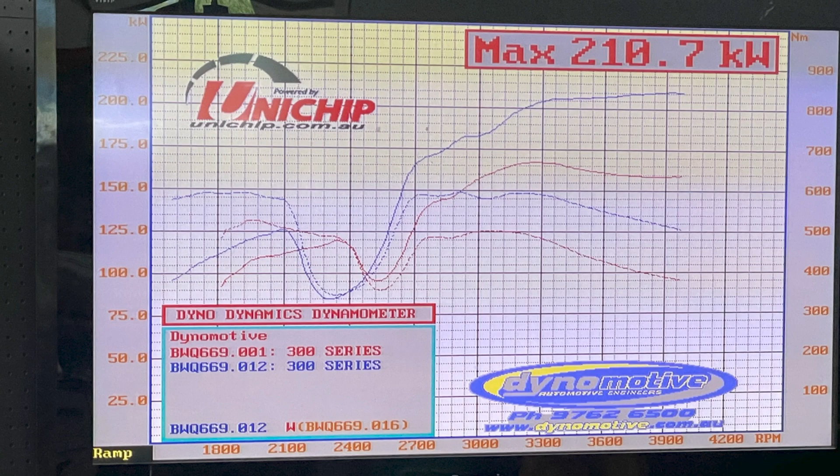Okay, so Unichip is an additional supplementary computer. It allows us to tune any fuel injected vehicle, whether it be petrol, diesel, LPG, whatever. It's been around since the 90s. I've been involved with it since then. It basically is an add-on module. You can do 5 different tunes.

So you're not locked into a tow tune or a safe tune or a power tune, where at the flick of a switch while you're driving, you can switch between 5 different tunes, whether it be power, towing, economy, bit of 4x4, which have all got different strategies built in, and you can change that on the fly. So that makes it really universal. You can't achieve that many other ways.

So that basically allows you to cater for all conditions that you might encounter while you're driving, whether you just want to have a bit of a go from the lights, or you're towing a van on the weekends. You can have a tune to suit every occasion.

The new thing about the 300 series is the turbo arrangement, being a twin turbo vehicle, and it's what you call a sequential turbo, so both turbos don't work at once. They basically run a little turbo below about 2,500 RPM, and then it switches over to a bigger turbo at the higher RPM. Hence why you can see the dip in those graphs, and that's basically where it changes over.

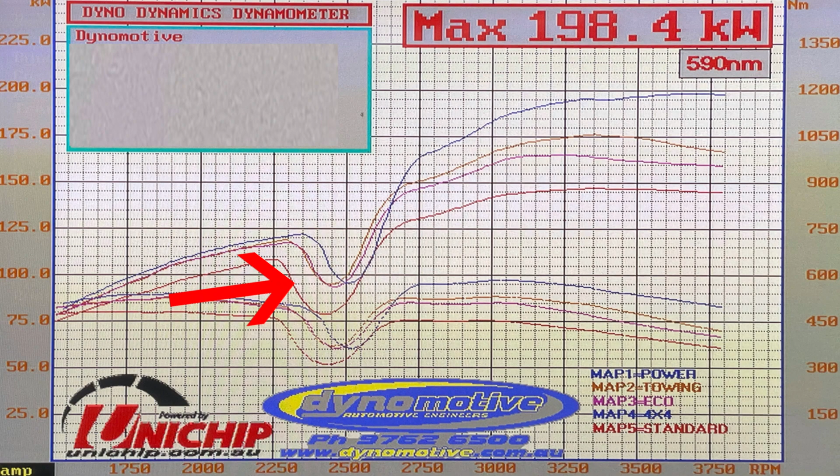So there's lots of flaps and controls. Basically there's a flap closing off the exhaust gas to the bigger turbo, and everything takes time for it to open and for that second turbo to start spinning and build some boost up, and that's why you see that dip in the graph.

It did offer a bit of a challenge tuning wise, just getting our head around it, what it liked, what it didn't like, how we can affect that dip in the graph between the changeover between the smaller and larger turbo. So that's been quite challenging, getting a good idea on how Toyota make these things work.

I just wanted to say thanks for giving me 5 minutes of your time so we can go on this drive. Well, I get out of it in 5 minutes, do I?

Well, what I'm trying to do here is not point out an obvious flaw with a car, just pointing out a way of detecting it so people can understand what we're talking about when we say the crossover point between the primary and the secondary turbo. A few manufacturers have had a go at the sequential turbo thing over the years, and they could never transition properly from primary to secondary. It's diaphragm controlled, so there's this massive void from one bleeding off to the next one coming on.

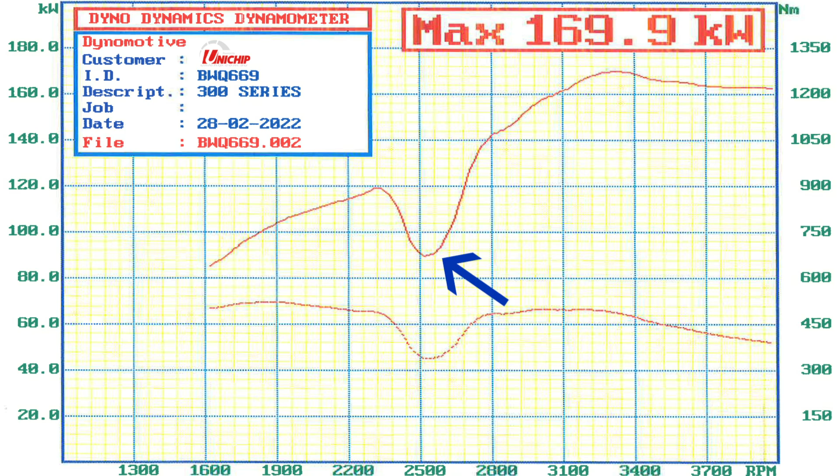The standard dip is 37, 38, 39 kilowatts of fall. So it falls 37, 38, 39 kilowatts and then climbs back out of it. And that's a fair old trough. That's a big drop in power and torque at that point. So to try and blend that out and tune that out so that we've got a 20 kilowatt dip. So it's still a dip, it's always going to be a dip. But we're trying to minimise that dip.

Yeah, look, most of the time you're probably driving through that point. And the 10-speed transmission is going to hide a lot of that dip, if you like. Transitions from the small turbo to the big turbo. But certainly on the dyno, it shows up quite obviously. Driving it, as you said, you don't notice it very much unless you're really looking out for it and you hold it right at that changeover point. Most people wouldn't even realise it's happening.

Rob gave a really nice explanation of the primary, secondary turbo and how it works, and there's a flap arrangement, a diaphragm control, and we're fighting with a mechanical setup, so the size of that diaphragm and how quick it responds and all those sort of things. We've got control of all that stuff, but there's a fair bit of mechanical stuff happening there that does take time. Rob thought that you could hardly feel it on the road, and depending on how you drive it, you can hardly feel it.

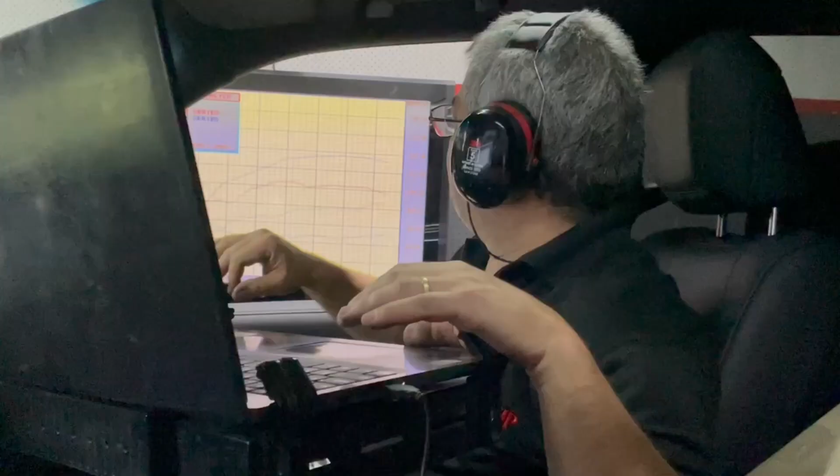Trying to get rid of the dips. Sorry? Trying to play around with the dips in it. Is it working? Yeah. It looks better. Yeah, better than the first one.

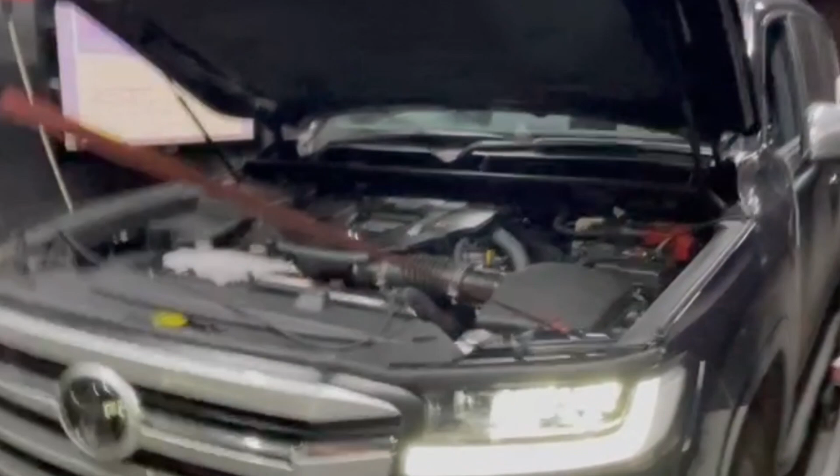It's not just stock LC300s that we see. In fact, I doubt very many of them that come through the shop are going to have factory airbox and factory snorkels and things like that. The majority of them are going to be modified. If you judge the 200 series or even the Y62 Nissan Patrol, people are going to use these for four-wheel driving. They're going to bolt everything to it.

So I wanted to touch base on the differences between a factory one and the setup that we've developed for it versus one that does have a snorkel and an airbox. So I grabbed the details off this customer's one that we were in the middle of doing as well. I just thought I'd throw some information because surely people are going to ask these questions.

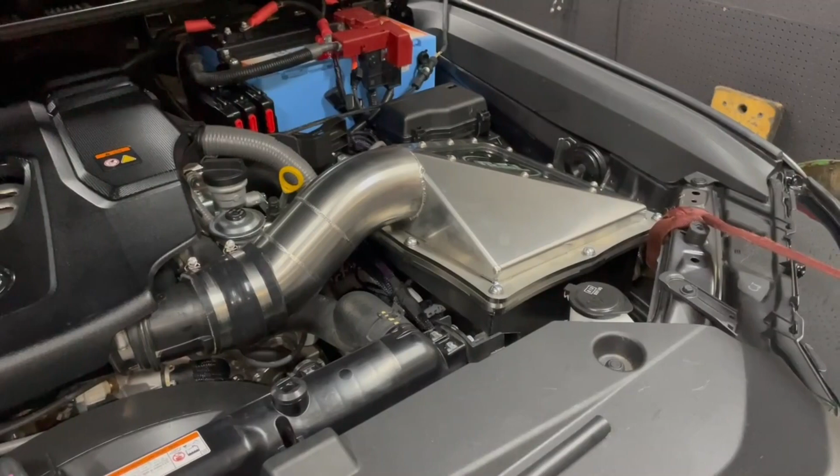Yeah, look, I mean, it is a little bit more difficult. It took a little bit more time to just get our tuning strategy around this twin turbo setup, especially with airflow characteristics and limits, if you like. I mean, obviously with this car, we'd never done one before. We've done all our development on a dead stock car, as we always like to do.

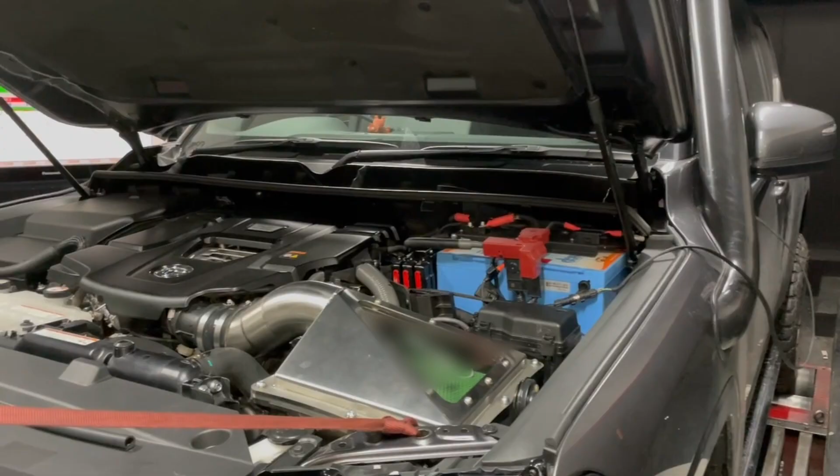Whereas this thing's got an aftermarket airbox and a rear-facing snorkel. It just brought a whole new level of problems. It was quite amazing. The dips just kept coming and coming and coming, and they wouldn't go away. So I've just spent the whole morning doing a tuning strategy for this particular vehicle, and I guess that's the whole idea of the Unichip.

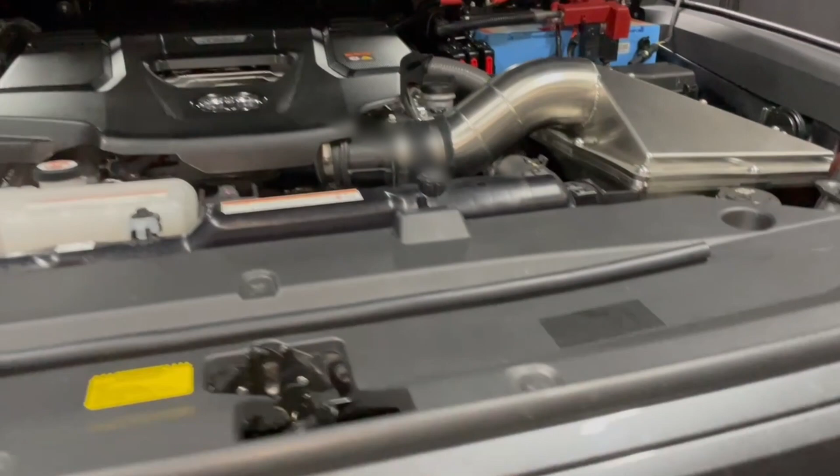We can custom tune to suit your mods, and I think what the 300 has shown is these mods, which are quite common mods, are really going to have an effect on your overall power and your overall drivability. Like I said, it's required a totally different tuning strategy than it did with the standard airbox.

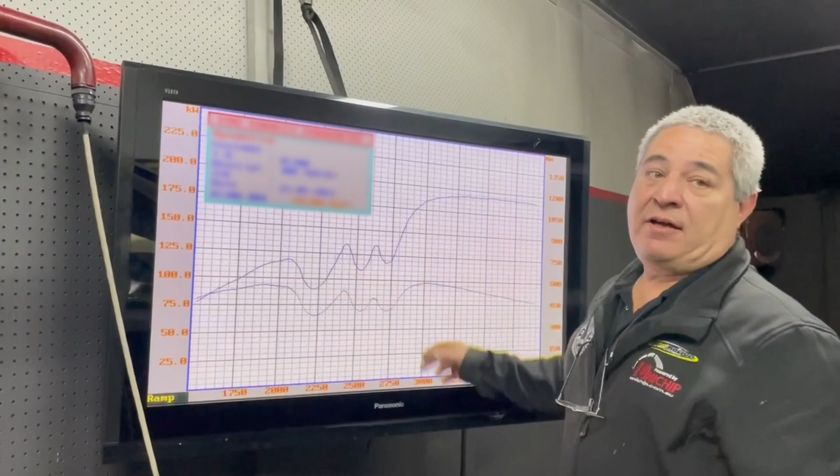See here, this is just a graph of what I was explaining earlier about the airflow through the airflow meter not being happy. This is what happened when we just fitted the tune basically out of our own vehicle into this one, which has a modified airbox and snorkel. And you can see we've got the dip that happens as it changes over to the bigger turbo, and then it just got all these other big dips where it was obviously not happy with the amount of airflow through the airflow meter, and it was doing some crazy things with boost.

So obviously that's what we have to spend some time on to get around that and tune this vehicle to suit the airflow demands with this air cleaner and snorkel package. And that's the thing, there'll be different brands of airboxes and different brands of snorkels. Everyone's got their own idea on what works and what doesn't. So these are going to need a bit of fine tuning at the end when you're getting this fitted up.

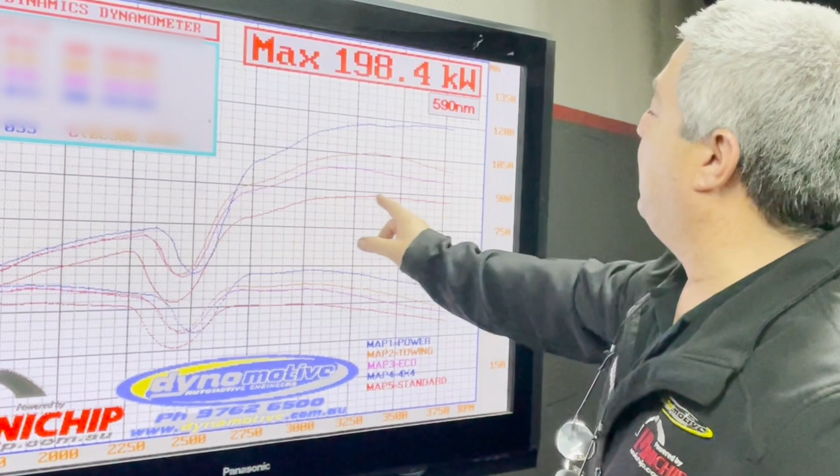Okay, so as we can see here, our red line is our standard power, or our before power, which on this vehicle was just below 150 kilowatts. Ours made 165, so it is a little bit lower, isn't it? Yeah, and that's why we tune every vehicle live on the dyno, and it's just not one size fits all. That's why we custom tune to suit every vehicle.

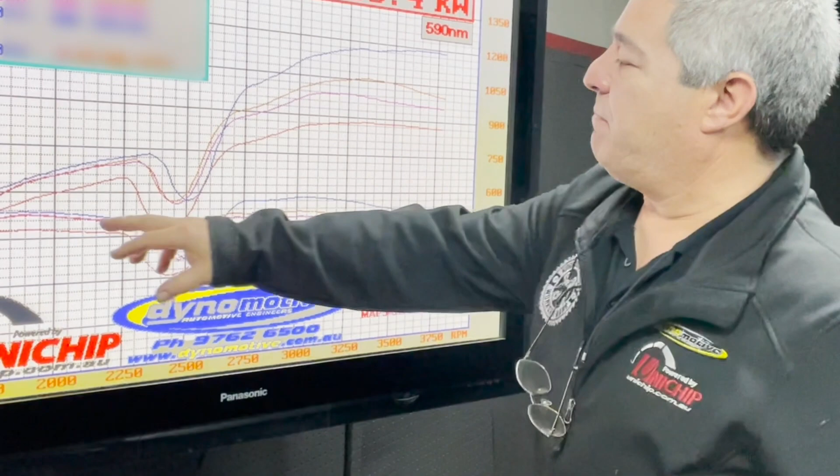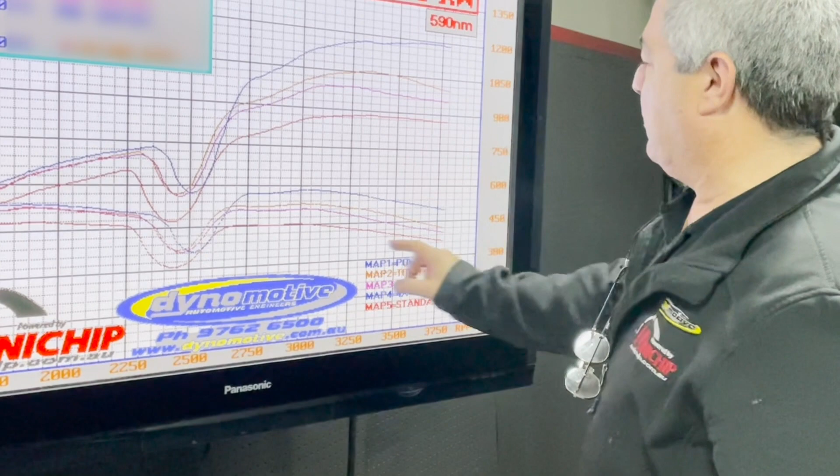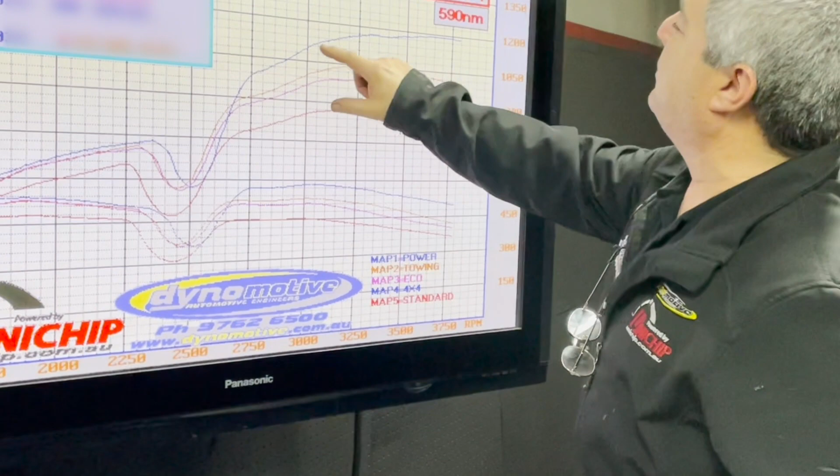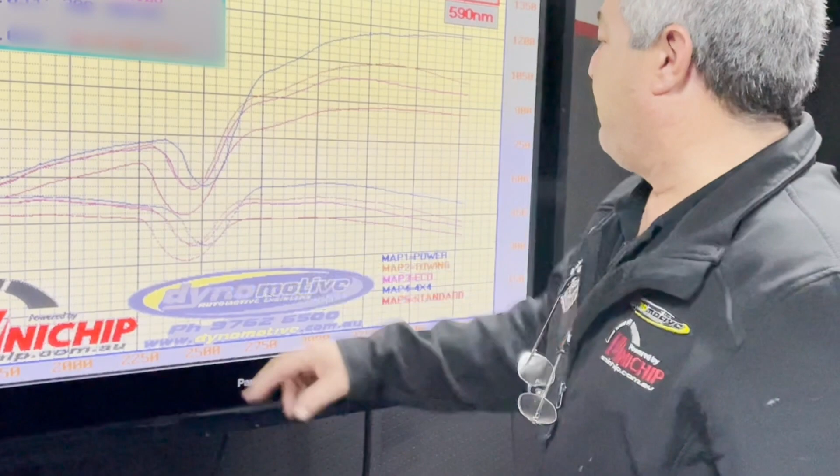Yeah, so you can see the 150. You can see there's that dip in the power, and that's basically where it transitions from the small turbo to the big turbo. Got our torque along this side, so you can see it made around 450 newton meters of torque. And here we have our different tunes. So blue is our power tune. You can see it made 198.4, call it 200 kilowatts, and 590 newton meters. Obviously down low we've picked up a good 50-60 newton meters as well.

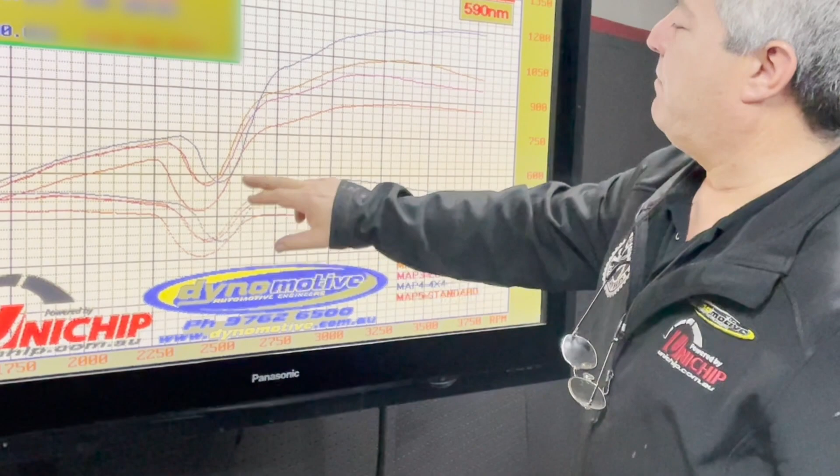The dip in the changeover point is considerably less. You can see how long it took in the standard power. We've managed to reduce it. We'll never be able to get rid of it completely because it is just a mechanical thing. It's not a tuning element. Obviously there's mechanical properties going on.

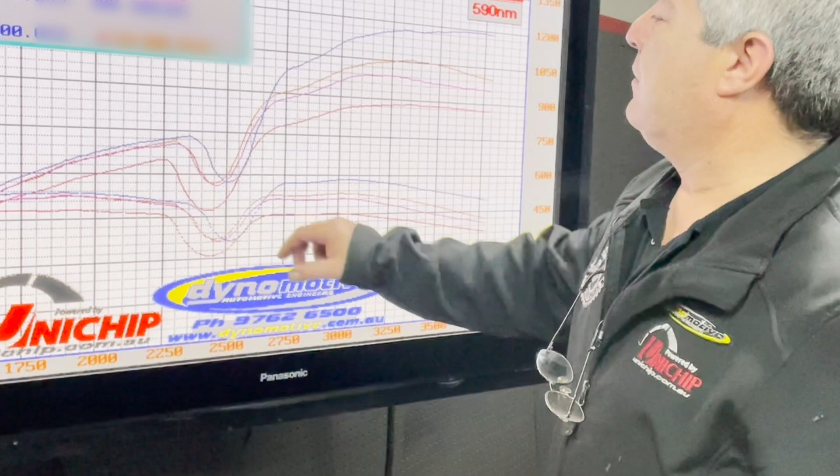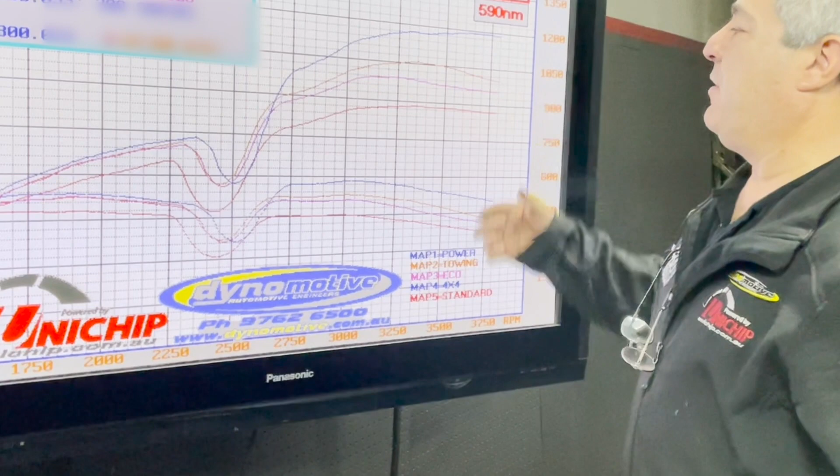And then you can see we have our tow tune and eco tune, which all just make a bit less power, a bit less torque. Obviously safer AFRs for towing and economy, and different throttle strategies, and all that with the safety of water temperature protection in the background. So I think it's come up quite well.

All right, so final takeaway from this video. I guess it goes to show, do you need a snorkel and an airbox? The answer is no. It produces more power with a factory airbox. Having said that, if you are going to go four-wheel driving, you're going to go through river crossings and you plan on sinking your car, absolutely buy a snorkel, buy an airbox and get it tuned to suit.